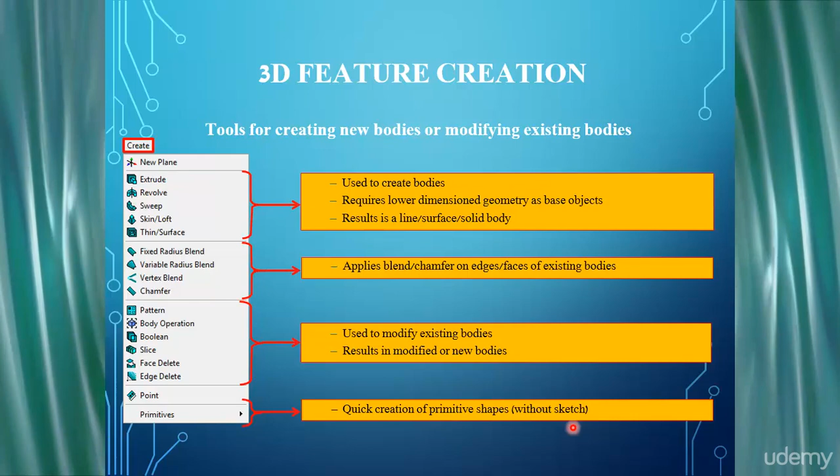But if we wanted to create the cube from scratch without having to do the creation of the sketch, we could just go to primitives and select the box or cube option and create it directly, and that would create all of the lower topology automatically without having to do it all manually.

So the first option then at the top of the list is the extrude option. We'll go through some of the details on the extrude. Extrude is probably one of the more well used tools for body operations within Design Modeler.

So it's useful to talk about some of the options available in the details view for extrude. If we go to the details view, we can see on the top right here we have 3 key options for geometry, operation and direction vector.

So the geometry is the base selection from which the extrusion is going to be applied. This can be a sketch, a face, a named selection, and we can take any of these and identify them in this box here. We simply left click on this box and drop down and then choose a particular entity, sketch, face, etc.

And we can do that by just simply selecting in the structure tree the particular sketch or face we want to apply, or we can select in the GUI if we want to select a particular face, for example, for it to be applied. The operation is then, we have a number of different options available for this extrude, because it need not necessarily only be for sweeping out and adding material.

We've also got some other options for cutting away into the existing material with this extrude option. So it's not simply just an extrude, it also has some Boolean capability there as well.

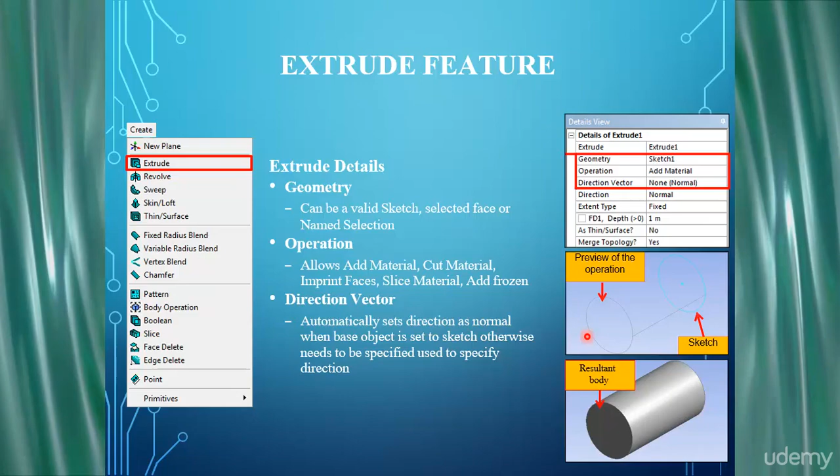So here are some of the options for extrusion that are available, and they're listed down here as we saw in the previous slide. So we can add material, we can add frozen, we can cut material, imprint faces, and we can slice material. And the results of all of these types of options can be seen at the bottom here, with the base geometry being shown on the right hand side of the screen.

So here we have this cube, which is 1 part 1 body, and it's an active body because it's opaque, and we have this sketch which has been created on a plane which has been created on the face of the cube.

So the first operation then, if we add material, this will create a body, and because we're adding material and the original body is also an active body, it will automatically agglomerate with the original body, as can be seen here on the left hand side. So we end up with one part, one body in this case.

Now this is because we've got coincident faces essentially on these two bodies. On this second example with add frozen, the second body is now a frozen body, and because one is frozen, one is non-frozen, this means that they're not joined together and they are separate bodies. So neither of these bodies sees the other body, but they exist, and so they exist as separate parts because of that.

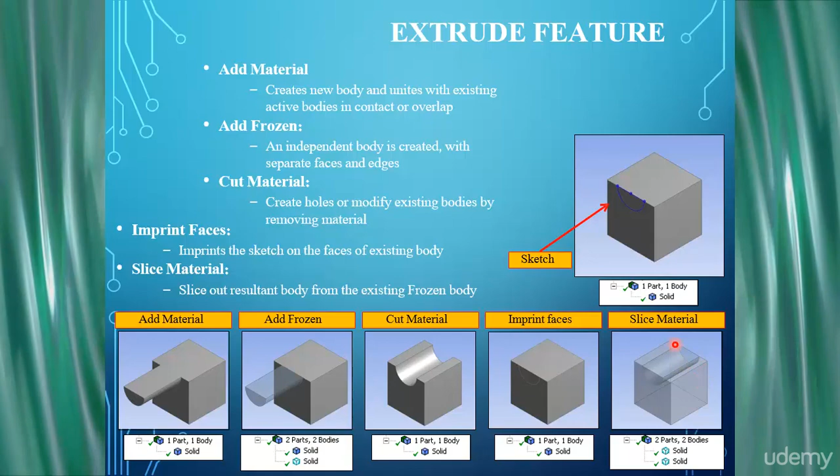Now if those two bodies were sharing an intermediate face, then we'd have one part and two bodies, but as it is, because they don't see each other and because they're both frozen, then we have two parts, two bodies.

Okay, so on the extrude direction option, you'll see you have a number of different options available. On the right hand side here we can see details of extrude. We've talked about geometry, operation, direction vector, and then we also have this direction here: normal, reversed, both symmetric, both asymmetric. So we can extrude it in a single direction, normal to plane.

We can reverse the direction just by selecting reverse, and it will switch it and flip in the other direction. We can have the extrusion performed in both directions as a symmetric extrusion. For example, we take this sketch and extrude it in both directions by, in this case, 5 meters as a fixed extrusion. Or we can decide to do an asymmetric extrusion, such that we extrude one direction, for example 1 meter here, and the other direction 5 meters. So there's an asymmetry in the extrusion.

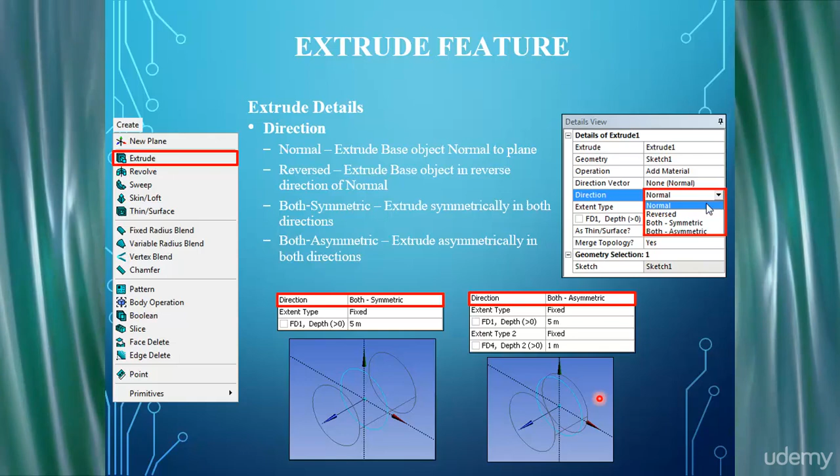So it need not only be in one particular direction; it can be in both directions, and we can also control how far the difference between the positive and negative directions for extrusion as well.

We can also choose an extent type. So here we are defining how far the extrusion will go on for, and we can specify a fixed value. This is the default, and we manually specify how far the body will extrude. In the last example, it will be 1 meter or 5 meters, and it will extrude for that distance and then terminate. But we could also have some other options that we can choose for the extrusion extent type.

We can also say 'through all', which allows it to pass through all the bodies, all the elements, up to the final entity, as shown in the center option here. We can see it's gone through all of the parts, all of the body, up to the final entity of the body. We can also choose the option 'next', which will terminate at the first part of the next entity that it encounters, as you can see here in this first branch, and it stops.

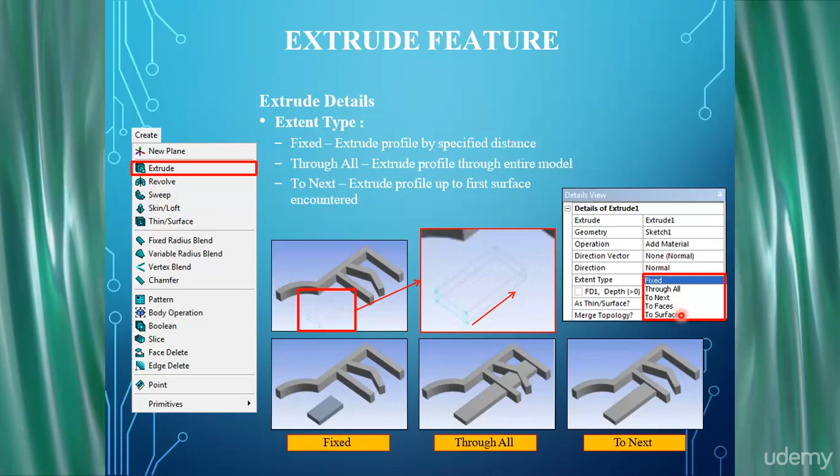We can also choose other options, to particular faces and to particular surfaces as well. We can control the extent type to surfaces and faces that we briefly described in the last slide, and here we can see an example of that. We've identified this particular set of faces, as seen in this upper left image, and the extrusion will terminate at these particular faces.

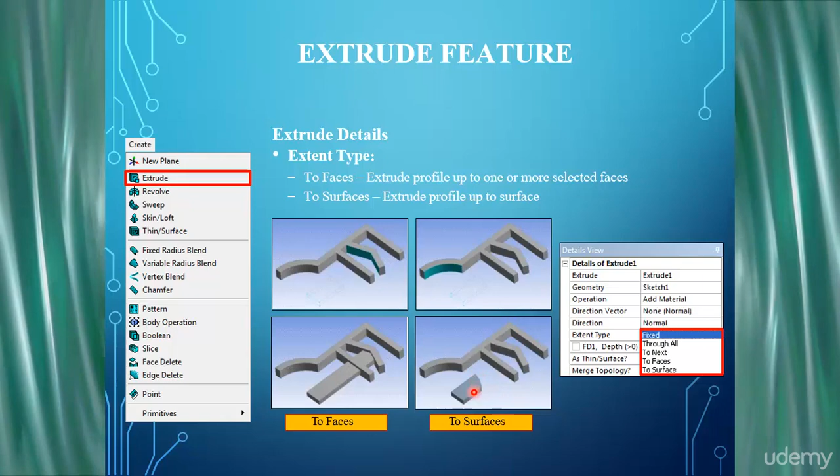A neat way for controlling extrusion is also 'up to surfaces', where we can identify where the extension of the surface would reach and effectively terminate the extrusion at that extension surface, even though that surface is not a created surface in terms of an existing entity where it would conventionally terminate. We can extend an existing surface to imply a termination of the extrusion, as shown in this lower right image, where we've terminated along this arced face where this arced face would be.

Another option for extrusion is a thin surface extrusion, which can be quite a useful tool, especially if you have surface bodies, in order to build out into thick solid regions. If we enable it, which is an option at the bottom under 'as thin surface', default to no, we can switch this to yes, and then we'll have some options on inward and outward thicknesses.

Here we can see we have a surface body, because this is just a surface that's maybe created from this sketch, and here we have one part, one body, and the surface body, which is a member of this part. We can see this little icon with this surface identifying it as the surface body. Once we select that for use as the extrusion, and specify some values for inward-outward thickness, we can extrude it normal to the plane to essentially bring the surface out into a solid in the direction normal to the plane itself.

So it's moving radially outwards and inwards in order to build up that solid. So we go from a zero thickness into a non-zero thickness body. That's useful for creating shell bodies, and we have some options for manually specifying thickness as well.

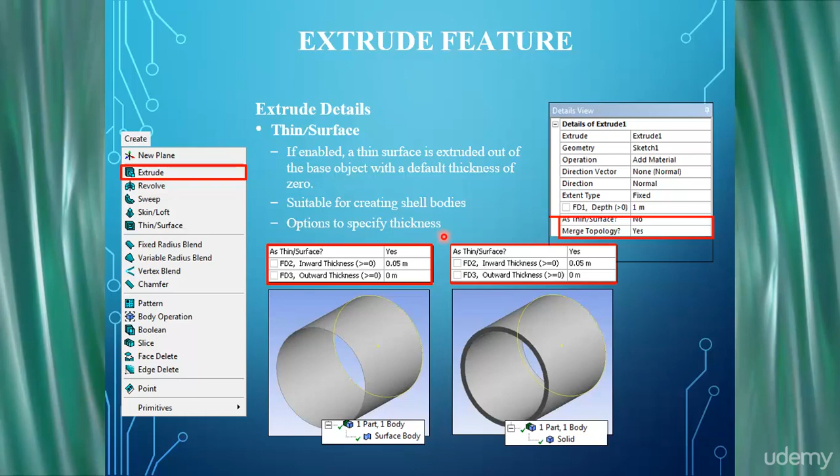There's also another sub-option under the Extrude feature creation called merge topology. Basically, once the extrusion is performed, we can elect to automatically merge the lower topology after that body's been formed. If we select yes, it optimizes the topology of the feature bodies. But if we leave it as no, it will leave all of those lower topology features there.

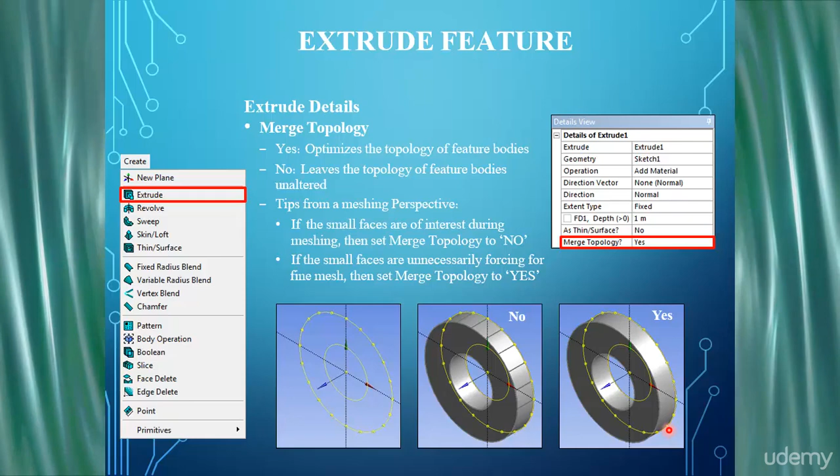If that's really not needed, and it's only used for the geometry creation as part of the extrusion of this sketch, then we don't need to be restricted by it when we get to the meshing stage. So we can simply opt for yes, which removes all that, and also removes the need to constrain placement of nodes on all of these intermediate edges. This gives us greater control for meshing and growth rates, with no need for placing nodes on all of those edges.